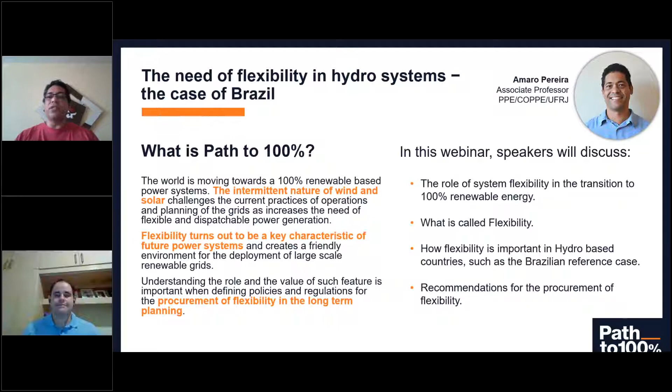For those who don't know this initiative, Path to 100 is an objective community intended to bring together top leaders and industry experts to discover solutions, raise awareness, and create a dialogue on how to achieve an operationally and financially realistic approach toward a 100% renewable energy future.

One of the main problems to achieve this goal is the intermittent nature of wind and solar power, which challenges the current practice of operations and planning of the grids, as it increases the need of flexible and dispatchable power generation. Flexibility turns out to be a key characteristic of future power systems and creates a friendly environment for the deployment of large-scale renewable grids. Understanding the role and the value of such features is important when defining policies and regulations for the procurement of flexibility in the long-term planning.

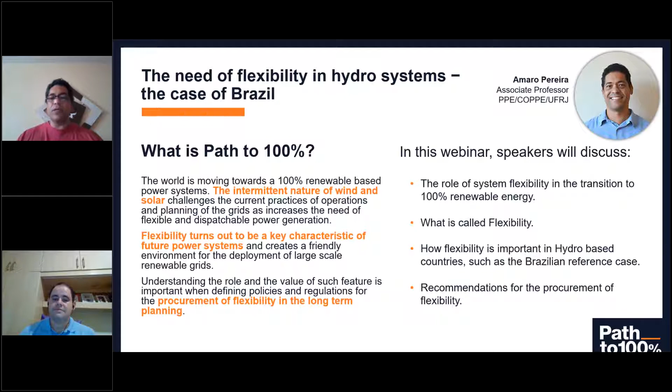Gabriel Cavado is Senior Manager at Wärtsilä Energy Business, and flexibility is the subject of his PhD research, and he is going to share with us his research.

Aniela Descalzi is a renewable energy consultant. She is an expert in solar power plants. She has worked in private companies, both in Brazil and Chile. And she has also worked for the Ministry of Energy in Chile.

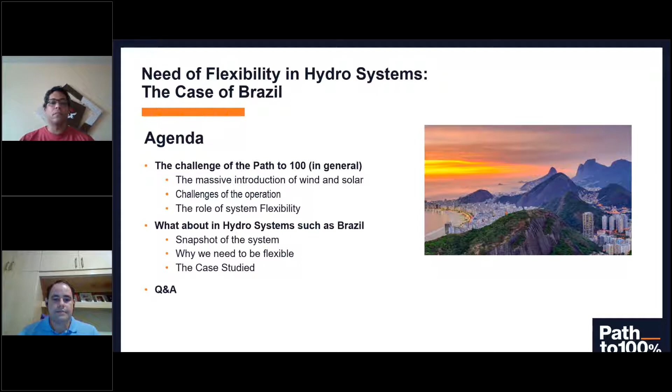Moving forward, let me see if I can. Yeah, there you go.

So talking about the need of flexibility, we need to recall the Path to 100 that Amaro just told us. So what is the Path to 100? As the word is saying, it's a way for us to achieve a society with 100% renewable energy resources. So this means in practice that in the near future, we will have an energy system, not only a power system, but an energy system in general, pretty much dependent on solar and wind, right?

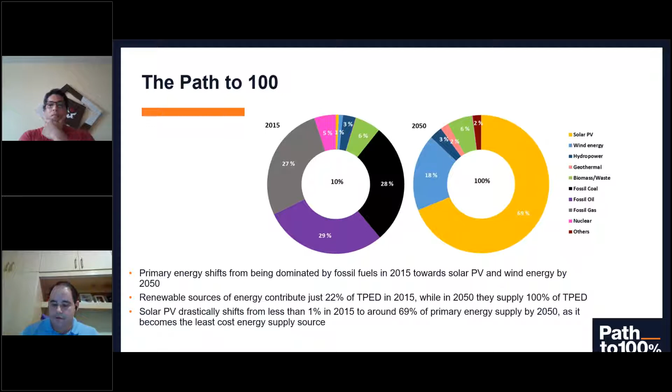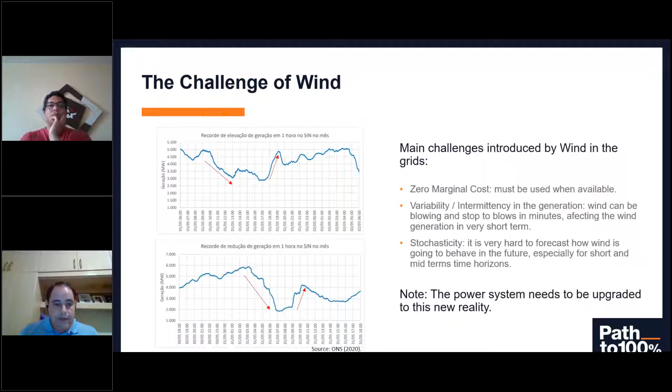So this is point number one. Now let's see about solar. Solar is a little bit better than wind, as you can see, because we all know that there will be at least a few hours of sun per day. That is something good, because if we don't get sun at least during a few hours per day, we have a bigger problem than the energy matrix. So sun is good in that direction, and we can forecast it a little bit more accurately than wind.

The problem with sun is that it's concentrated during the day, of course. So if we have consumption during the nights or during the morning, then we need either to shift solar from the day to the night, or balance the system with other types of sources in order to guarantee the reliability of the system when the sun is not there.

One important comment is that when we have a system pretty much based on renewables, we have to keep in mind that these renewable sources are free. So it is very important for the operators of the grid to use all renewable sources when they are available. That's why I put in both slides that these sources have zero marginal cost. So when we have sun, when we have wind, we must take it, otherwise we are wasting cheap energy and making the energy bill more expensive.

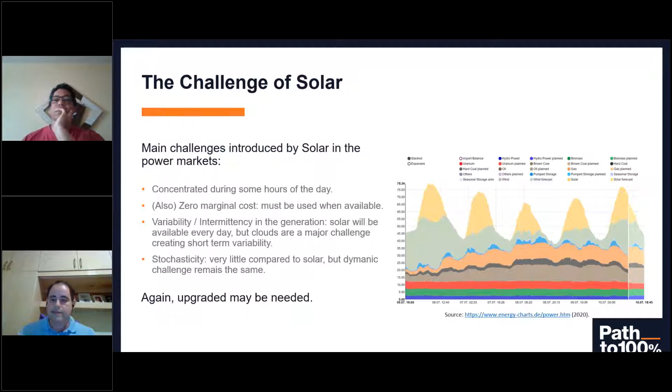My daughter taught me once the perfect meaning of flexibility in her mind. She's 5 years old. I was making a presentation to the Brazilian system operator a few years ago, and it was during the night, and she wanted to grab my attention, and I needed to finish the presentation.

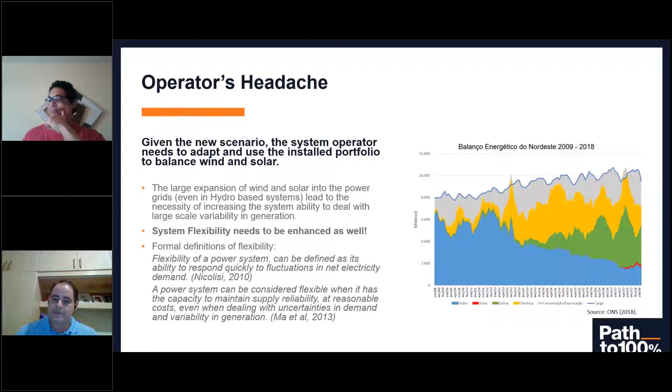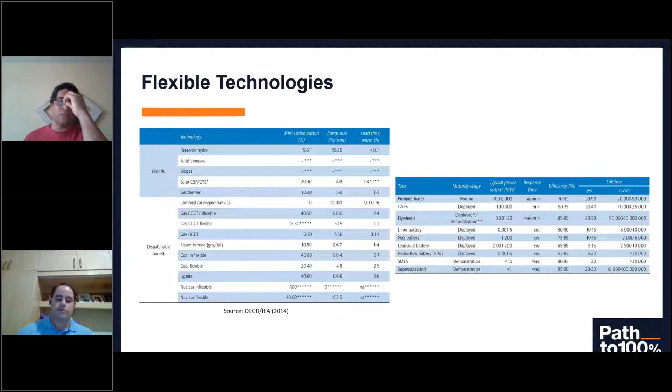Just to sum up this first session, I hope I could address that we are living in an energy transition, meaning wind and solar are the new base load of the systems. They are entering the power grids, and they are very cheap. So it's not only environmentally friendly, but economically makes sense for you to put a lot of wind and solar into your grid.

That means you need to increase the ability of the grid to respond to variations in wind and solar. So you need to increase your system flexibility, because flexibility was not a feature of the power grids of the past - since it was not needed, this feature was simply not built.

The hydro-based system has an advantage, because the hydro reservoirs, the hydro dams, do add a lot of flexibility into the grid. So this is very valuable, especially for Brazil, and we need to make use of that.

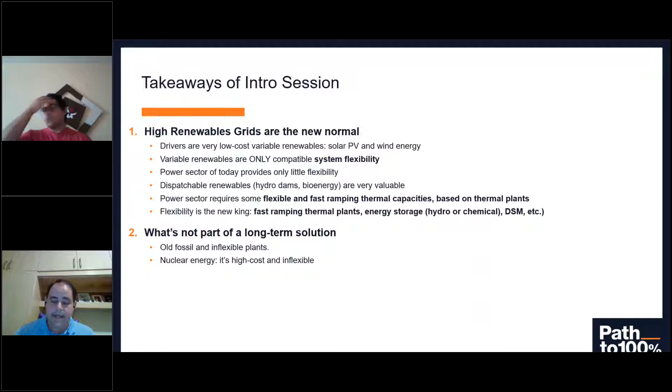Also, the energy sources that are not flexible will lose importance over time. So nuclear, coal, base load generation from fossil sources will be displaced over time with more and more renewables into the grid, because it will come to a point where renewables compete with fossil generation, and since they are the least cost generation, they will simply displace fossil generation. So this is the second message for this first part of the presentation.

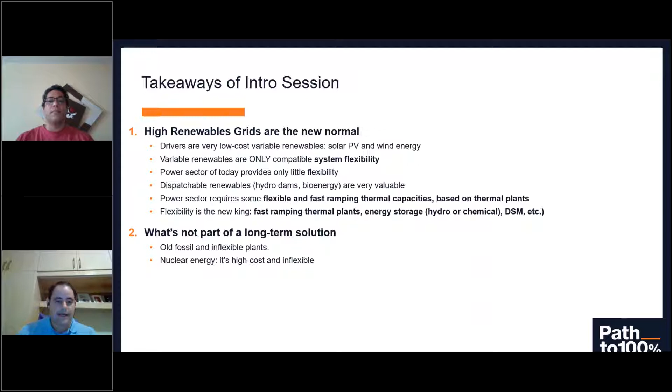I hate forecasts, but if I have to forecast the near term, I'd say wind and solar will simply dominate the new energy auctions we do in Brazil, because they are the least cost generation for energy itself. Even though we have a lot of participation from hydro, the effective generation of hydro is heavily dependent on rainfall. If we have a lot of rain, hydro can have a big participation. If we don't have much rain, the participation is reduced in terms of generation, and we have to use other sources to complement the hydro-based system.

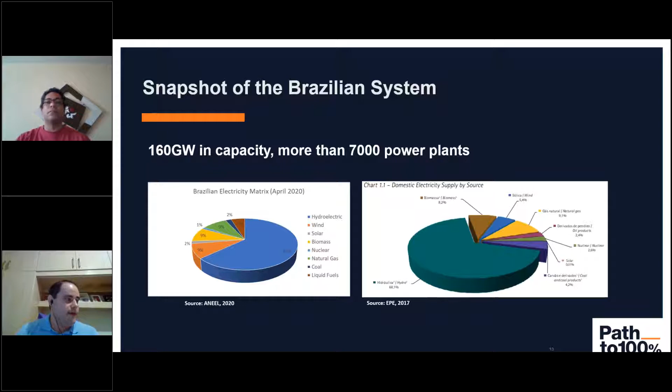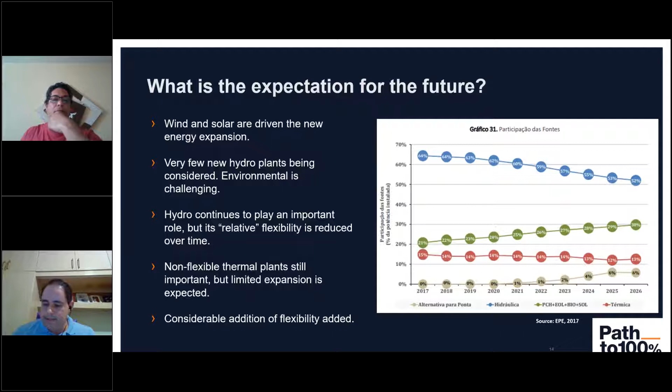We also have a new feature that EPE is taking into consideration, alternativa para ponta, which means peaking alternative. It's exactly this type of peaking alternative that we're trying to address, that hydro systems will need. EPE already realizes the system needs more flexibility, and probably we'll need to procure flexibility to make the system more friendly for renewables deployment.

Now I will share with you some results of a modeling exercise we did, using a software that can model a power grid in the future. I have 5 minutes to share this with you.

We took the Brazilian premises and put them into a software where we can run a long-term planning model, meaning what would be the long-term expansion of the system, and also, looking forward to 2027, how that system would operate considering all those flexible technologies we mentioned.

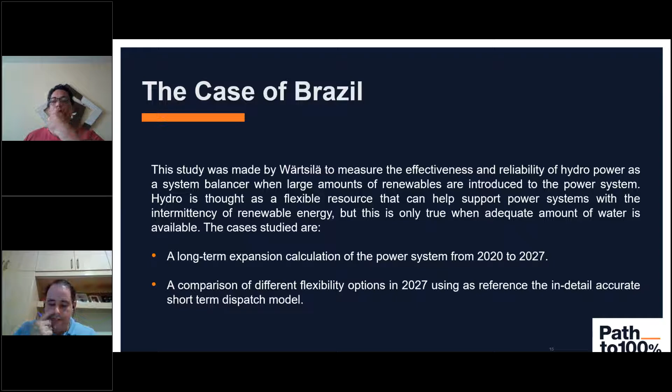We do have a lot of renewables being installed because they are simply the cheapest ones. The model selects the cheapest energy sources in order to build the expansion in megawatt hours.

We do have some baseload gas, and I have to make a comment here: this baseload gas is mainly driven by a restriction that we put into the model to restrict the amount of renewables, and very cheap gas.

This is important to take into consideration for the future. Base load still has its limited role, but only if we limit renewable expansion. Renewables are so cheap that if we don't restrict their amount into the grid, the model will select and expand them substantially.

There is not much hydro or biomass being installed, simply because we took that premise from EPE, and there aren't many bigger hydros to be installed. The software also concludes that the system needs roughly 10 to 12 gigawatts of flexible technology to be installed in order to cover variations in wind, solar, and water.

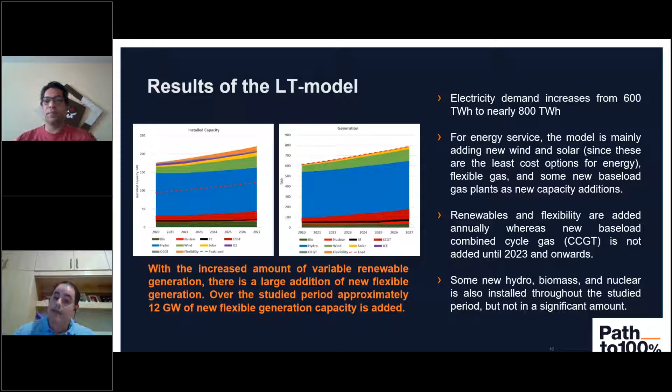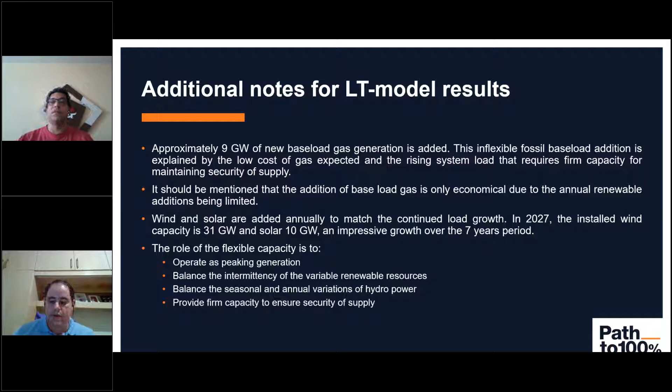Moving forward, this is just a summary of what I already explained in the previous slide. I decided to write it here just for reference of the audience. I will jump directly to the dispatch model that we did.

Let's see how this flexible technology behaves in the power grid, and you will see how flexibility is important even in hydro systems. That's the point of showing you the results of these simulations.

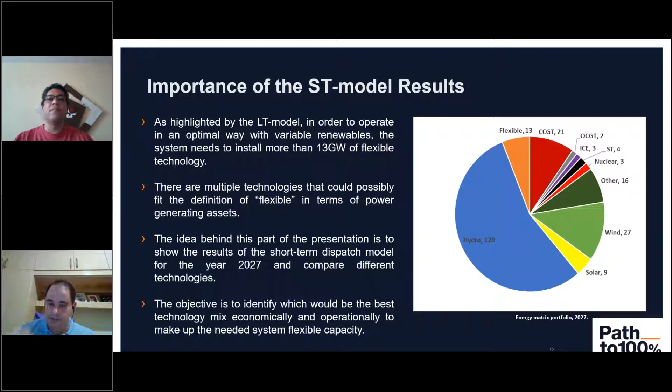These are the flexible technologies we are taking into consideration. We have one scenario with no flexibility at all, just so you can see how the costs of the system are very high if you don't add flexibility, mainly because you end up with blackouts due to this variation.

We have one scenario with RICE - not the food, but reciprocating internal combustion engine. We have 2 scenarios with gas turbines, one aeroderivative and another heavy duty. We also have 2 other scenarios, one for battery storage and another for pumped hydro.

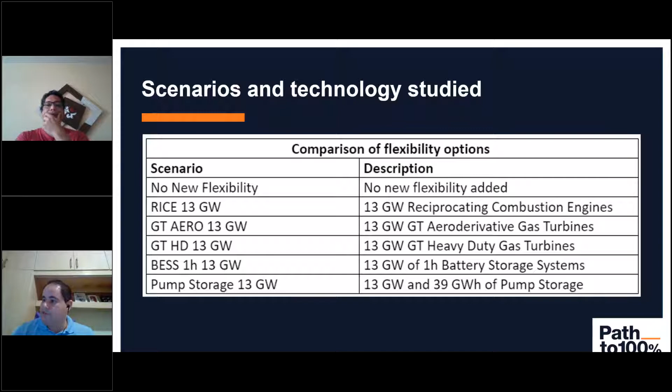So let's jump into the results. I have just a few minutes. These are the results, going from left to right. The first graph is the total cost of operating the system in 2027, considering each type of flexibility option I gave in the previous slide.

You can see that with no flexibility added at all, with no flexibility being procured by the system operator, the costs are very high. You can see that there is a cost of unserved energy that plays an important role there.

We can see 3 technologies that are behaving better for that grid: reciprocating engines and both gas turbines. This makes us think that very soon we will need to procure flexible power plants in order to deal with intermittency from wind and solar, because the grid can benefit from that installation.

We can see as well that battery storage and pump hydro are still not that close in terms of bringing value to the system operator. We know that these technologies are still evolving, so it can be that in the near future they can compete hand to hand with the thermal options we just described. It's just that with the premises we used, they are still not competitive.

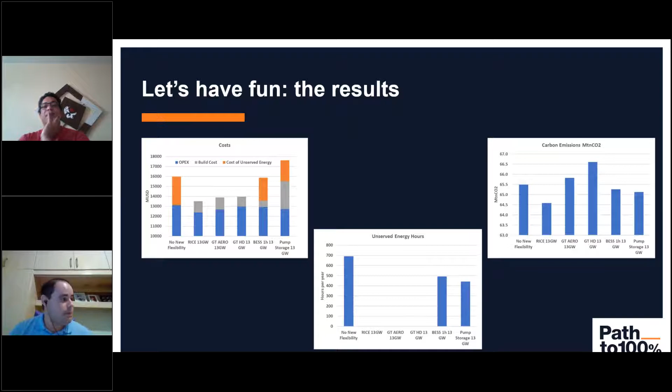I have two other graphs, one with unserved energy. The grid with flexible plants installed is able to keep the reliability of the grid, so there is no unserved energy at all. Also, for reference, we do have a scenario with carbon emissions from the grid, and you can see that even if you include thermal flexibility, natural gas flexible plants, into the grid, the emissions are lower. This is simply because with no flexibility at all, you have to dispatch your current plants in a non-optimal way, which means more emissions from the current power plants installed in the grid.

Moving forward, just for reference, I'm approaching the end of the presentation. We took, just for curiosity and for us to discuss later, how these flexible technologies would be operated by ONS, the system operator. You can see that during wet years and average years, the flexible natural gas plants would operate mainly at peaking time. This week was selected from September, because those from Brazil know that September is the month where we still have a lot of wind, and the hydro reservoirs are very low, so there's very limited flexibility from the hydros. You can see the natural gas plants still play an important role.

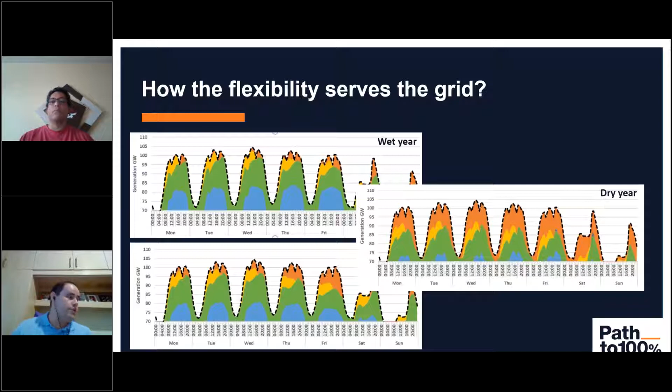During the wet year it's very minimal. During the average year it's minimum but still relevant. But during the dry year, the thermal plants can support the reliability of the grid, meaning they're not only supplying flexibility for wind and solar, but supplying flexibility to the hydro plants as well. The point of these slides is that hydro systems do have a lot of flexibility, but that flexibility is not there all the time — it's subject to rainfall. That's the role of flexible plants: you don't install them to use them, you install them in case you need to use them, and I think that's the real point.

This is just to show you the capacity factor and the number of starts and stops per year. You can see that during dry years, the dispatch profile is quite significant, but it reduces dramatically with good rainfall. The amount of starts and stops doesn't vary much, though. So even with wet years, when you don't dispatch these flexible plants much, you may still need to start and stop them for short periods to comply with grid reliability. This is important because it can be a huge cost for the system — some technologies have a lot of start and stop costs, so we need to take that into consideration when procuring future flexible plants.

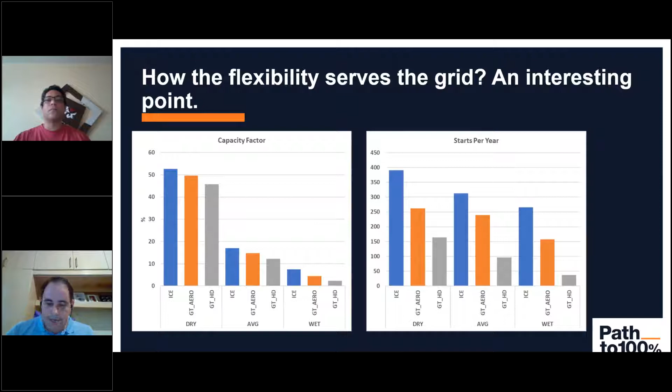So this is the last slide. Just to sum up, as already said in item number 3, these are the suggestions: flexibility should be a feature procured separately from energy.

So in order to keep reliability and the operational costs of the grid down, we need to procure flexibility and increase the flexibility from the grid. It must be procured on system level, because this is something that all agents of the system will benefit from. And it's important to take into consideration all of these scenarios, all of these uncertainties from the future, not only for the intermittent generation, but also from the hydro. Because if a dry year happens, and they happen quite often, we need to have competitive and cheap flexible generation in order to keep the costs of the system down.

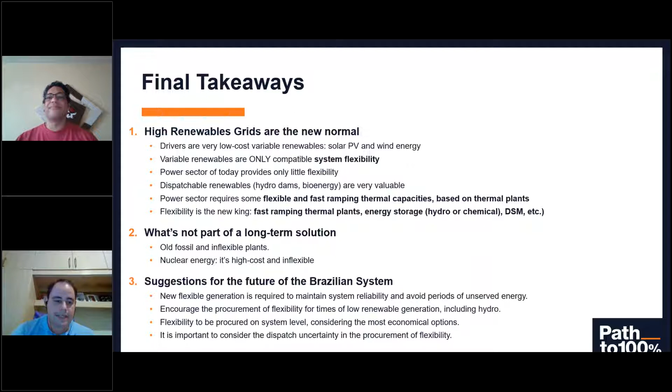So Amaro, I exceeded my time in 6 minutes. I'm sorry, but that's the message that I would like to start with.

Thank you for this inspiring presentation, Gabriel. So, besides the ability of dancing ballet, according to Gabriel, the concept of flexibility is the ability to respond quickly to the fluctuation on the demand.

Aniela, do you think we can include some elements in this concept, so that we can improve it? Hello, good morning, everybody. Thanks for your question, and congrats, Gabriel, for your fantastic presentation. I think you included everything, and it's been difficult to contribute with more points.

But regarding your question, Amaro, I think that the official definition of flexibility is extremely open. I think that when we talk about flexibility, as Gabriel noted in the presentation, we have to talk about flexible generation, transmission, ancillary services, topology of the system in regards to geographical flexibility, and also temporal flexibility, okay?